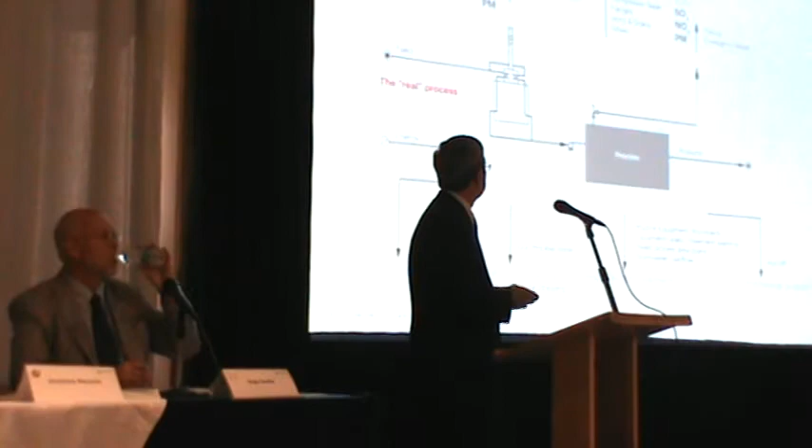Now, this slide is typical of any process unit. I apologize for the small print on this slide, but hope that you can study it more when you have the handout. What this slide shows is feedstock and energy coming from the left, and products going out from the right. There are air emissions shown at the top, primarily furnace stack emissions, fugitive VOC emissions, and any emissions from flaring or emergency relief. On the bottom of this slide, you will see water that needs to be processed: oily water to a wastewater treatment plant, processed water to a sour water stripper, and storm runoff water.

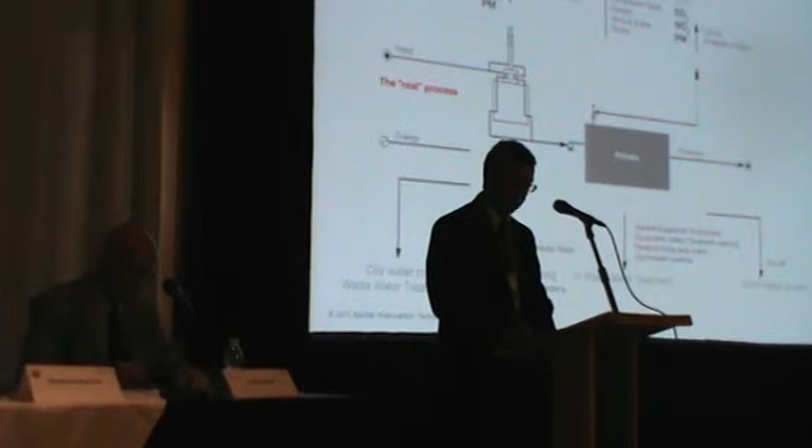Now, the emissions in a DCU unit are similar to those in a typical refinery unit shown in the previous slide. On the left, we show feedstock entering the process and products leaving. On the top are the air emissions from the same sources as in the previous slide, with the addition of particulate matter from the coke handling area in a delayed coking unit.

The water treatment is actually less dependent on treatment facilities outside the coker because of the closed blowdown system, shown at the bottom left. Oily water is processed in the closed blowdown system and returned to the process. Storm water normally is used within the process. The DCU actually reduces the burden on the refinery waste stream system by processing oily water and oily solids.

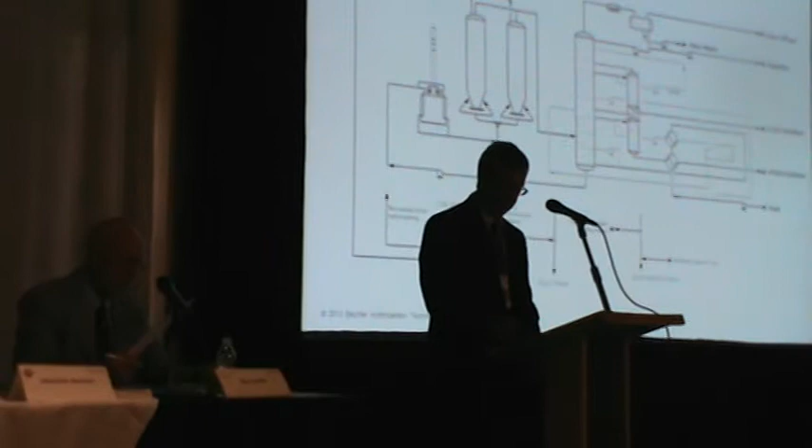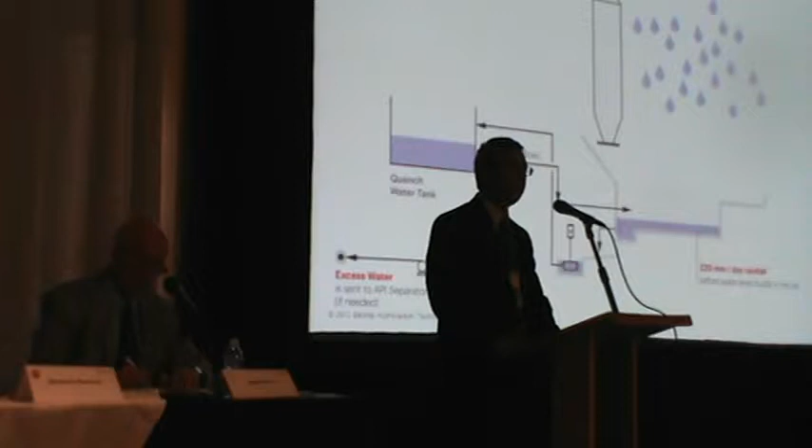Now let's begin by looking at water utilization in the process. We'll start with stormwater handling because this is relatively easy. Almost always, any rainwater that falls into the coke handling area is contained within the system and leaves as moisture on the coke product. In this example, typical annual average rainfall for a coker located in Malaysia is 10 millimeters per day. It can be a lot more than that, but rainfall would need to be greater than 220 millimeters per day to result in routing excess water to the stormwater handling system.

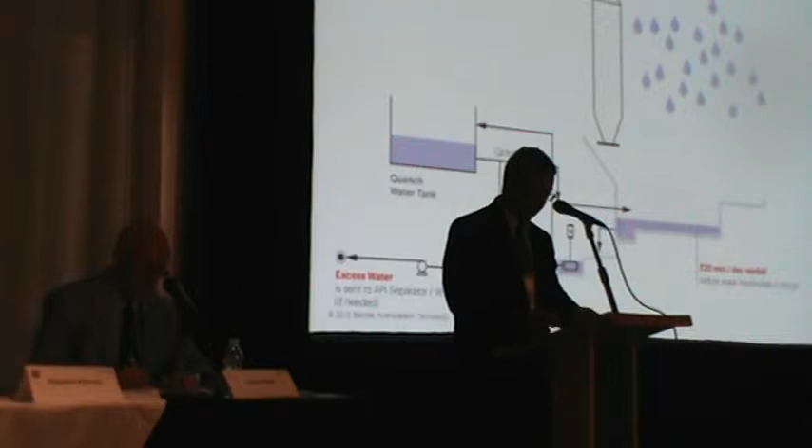As briefly discussed a few minutes ago by my colleague Rick Henneford, the steam is routed to a closed blowdown system, where it is condensed in the quench tower overhead cooler and separated from hydrocarbons in the blowdown system.

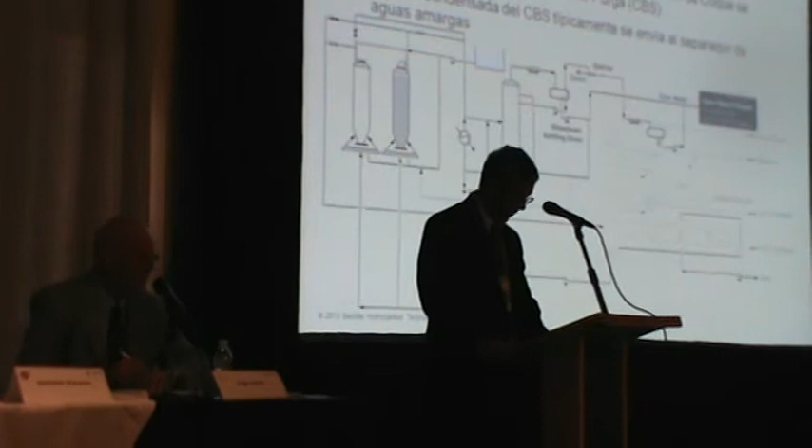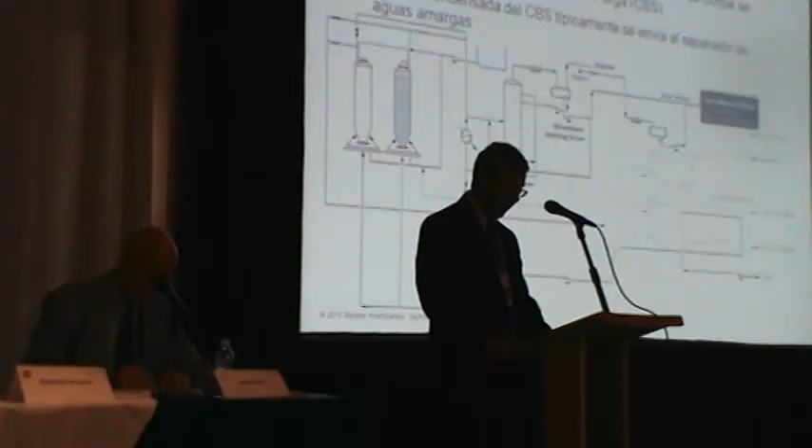Now, the sour water from these sources is routed to the sour water stripper. The main point of this slide is that all processed water from the DCU unit is contained, separated from hydrocarbons, and routed to the sour water stripper.

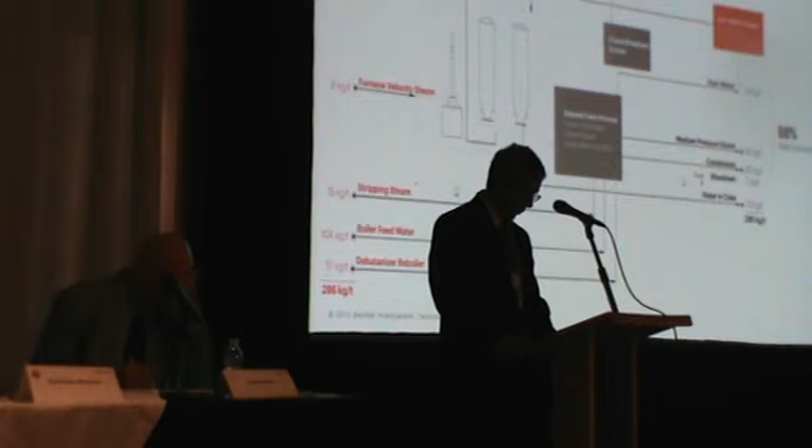Now the water that leaves the DCU, a little over half leaves as steam and condensate, about one third as sour water to the sour water stripper, and the remainder goes out mainly as moisture on the coke product. Overall, 88% of the water or steam that enters the unit is recovered for reuse within the delayed coking system that we designed.

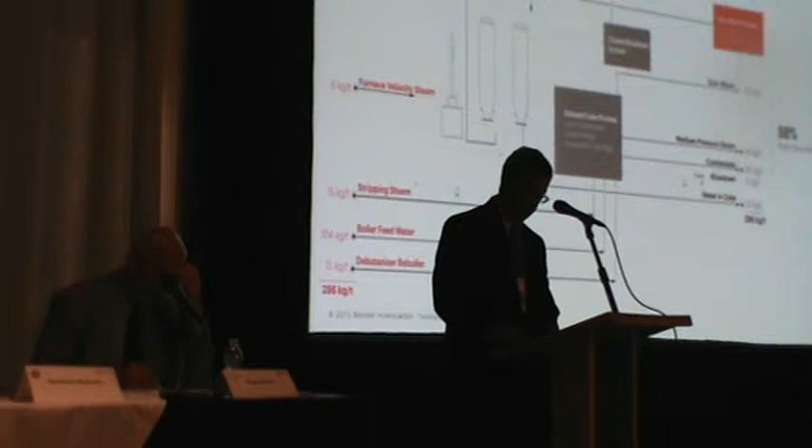Okay, now let's discuss airborne emissions.

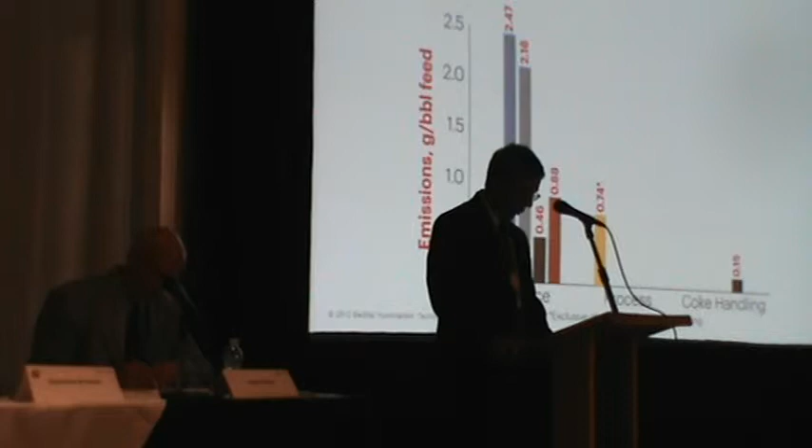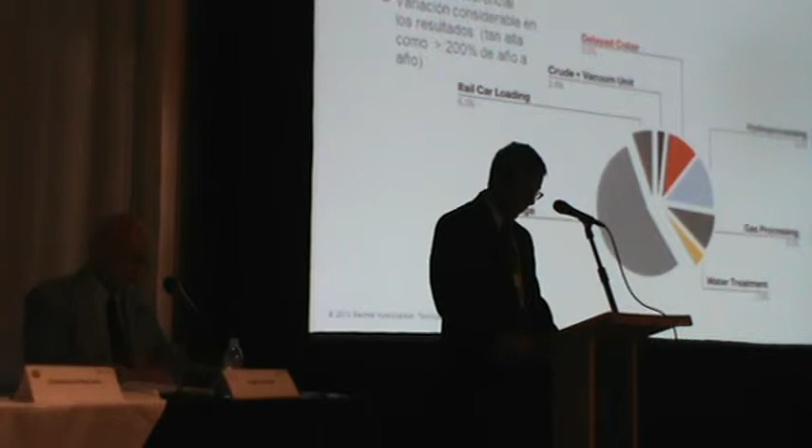In this case, tankage contributes over 50% of the VOC load from the refinery. Hydroprocessing was next at about 15%. Delayed coking and gas processing were about equal at 10% each. Everything else added to 15%. So as you can see, although 10% of the VOC emissions is significant, the DCU is clearly not the largest producer of VOCs.

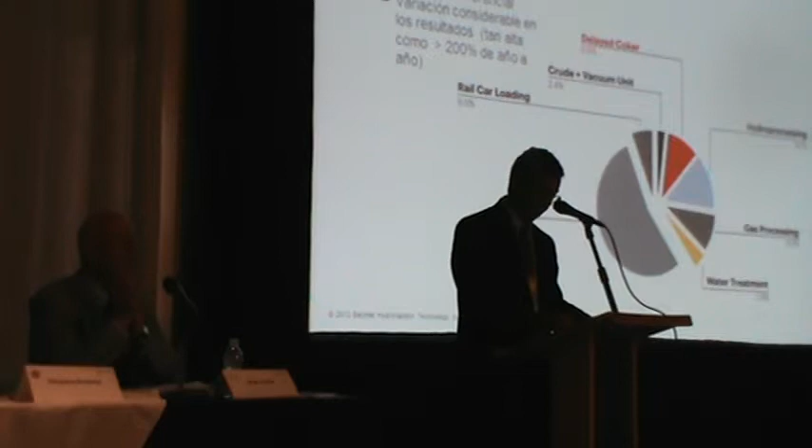With that said, let's take a look at VOCs in the delayed coking unit. One area of process VOC control that has received much attention lately is opening of the coke drum to the atmosphere after the drum has been filled with coke and cooled with quench water.

For the quench cycle, water enters the bottom of the drum and is vaporized. Steam leaves the top of the drum and is condensed in the quench tower overhead cooler. During this period, the non-condensable vapors are routed to the main fractionator. At the end of the quench cycle, an ejector is used to reduce the pressure on the settling drum to almost atmospheric pressure.

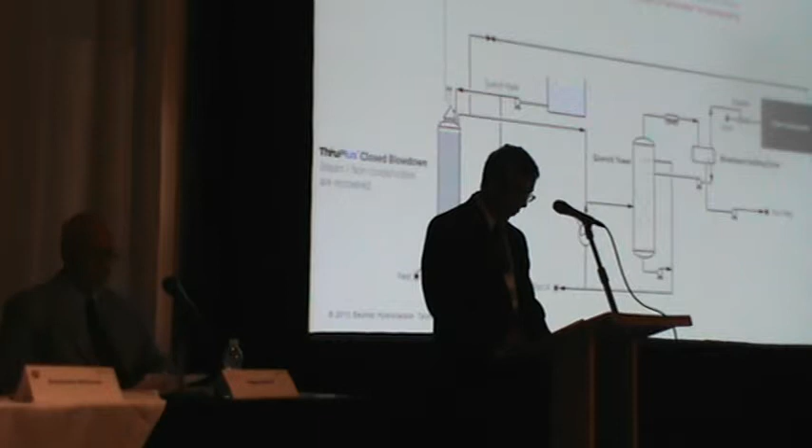Okay, turning to particulate matter, the emission sources that are of most interest are the solids handling system in a delayed coker. We will consider two areas of the delayed coking unit, the pit pad area and the coke handling and storage systems areas.

It starts by sliding down a sloped wall that acts as a barrier between the coke handling area and the process unit, and Rick described previously. The whole coke storage area is surrounded by high walls. These walls, along with the slope wall, effectively keep coke out of the process area of the DCU.

After falling down the slope wall, the coke enters a pit filled with water that keeps the coke fully wetted. From the pit pad, the coke is moved with an overhead crane to the pad, where it decants to about 8% moisture. With an overhead crane, there is no dust generation as there would be with wheeled vehicles.

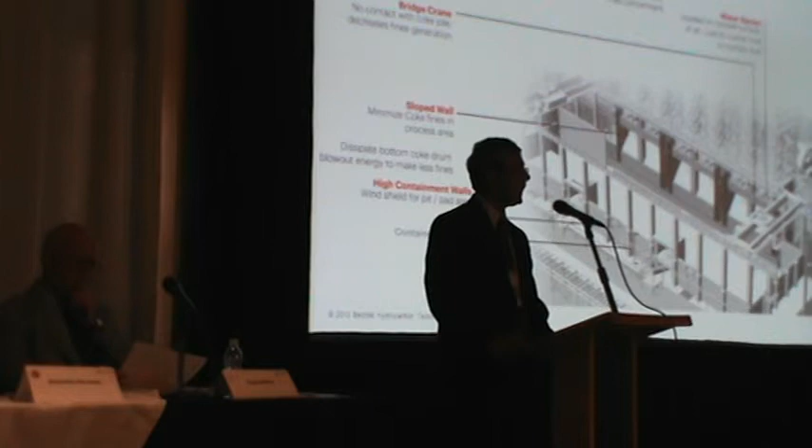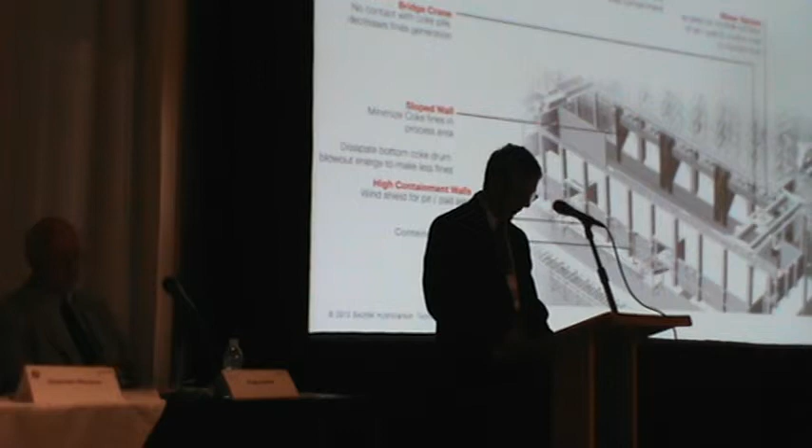After about 24 hours on the pad, the coke is loaded into a coke crusher located inside the high concrete wall, so any spillage goes back onto the pad. Finally, there are water sprays located around the perimeter to maintain moisture on the coke as needed.

The mode of transportation used to move coke from the refinery has a large impact on the design of the coke handling and storage system. Most of the features shown here are typical of all coke handling systems: maintaining proper coke moisture, an enclosed conveyor system, enclosed loadout system, and dust control at transfer and loadout points.

The type of coke storage, open or closed, and the amount of storage is also dependent upon the mode of transportation. Trucks generally require less coke storage and ships require the most. Dust control can be effectively accomplished, but these are engineered systems and it takes an experienced design team to make that happen.

The point of this slide is that there are various options for coke storage, and these options vary in the amount of fugitive emissions that exist and also the dollars involved in implementing these systems. Each refinery is unique in what type of system they can accommodate.

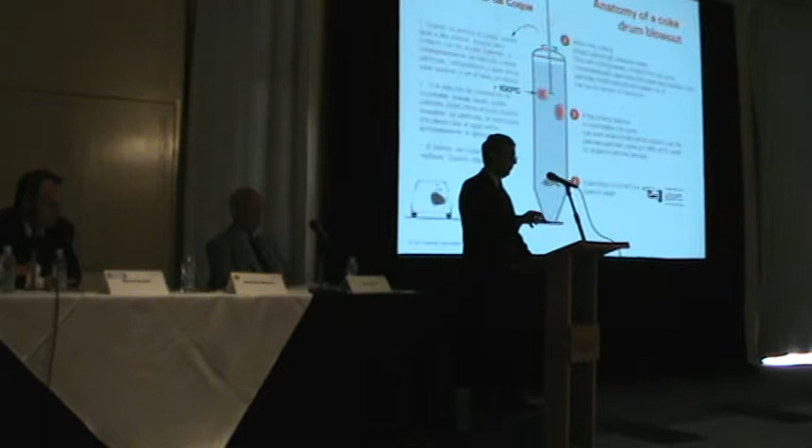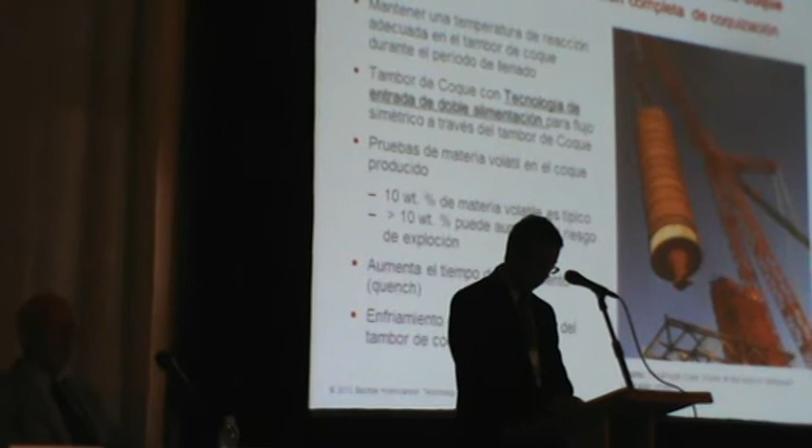I'm going to gloss over this slide because Rick did a good job in outlining blowouts and concerns of blowouts in a delayed coker unit. What I do want to briefly mention is the things that minimize the occurrence of blowouts.

Maintaining the proper coke drum reaction temperature usually means keeping the coke drum overhead temperature high enough to complete the reactions. A proper flow of feedstock into the drum is critical. Bottom unheading valves are a great invention, but they require different feedstock entry piping.

In many cases, a single side entry into the drum results in flow up one side of the drum, and the material on the other side of the drum cools and does not react fully. The local quantity of unreacted feedstock inhibits proper quenching and leaves hot spots inside the coke bed. Then we're back to the problems in the previous slide.

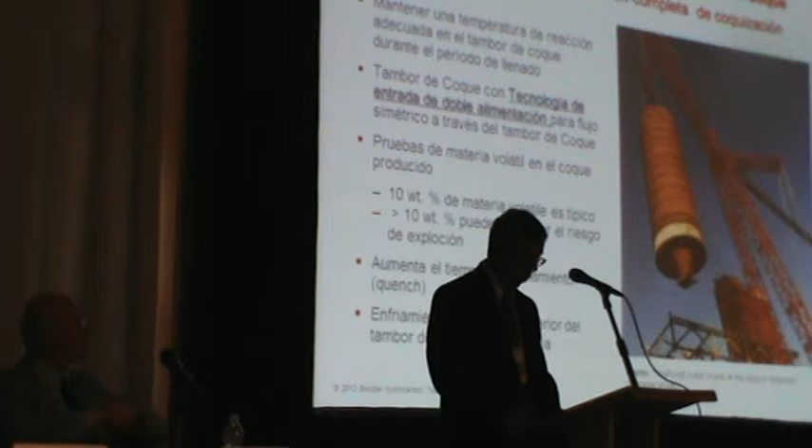Dual inlets have virtually eliminated this situation, and Rick has a presentation on dual inlet to follow shortly. Watching the VM content of your coke is a way of verifying that the coke bed is operated at an adequately high reaction temperature. Finally, quenching procedures are important to ensure that the coke bed is fully quenched prior to cutting the coke from the drum.

The Golden Eagle Refinery is located in the San Francisco area of California in the U.S., renowned for their environmental activism and stringent environmental controls. The Golden Eagle coker has been in place since 2008.

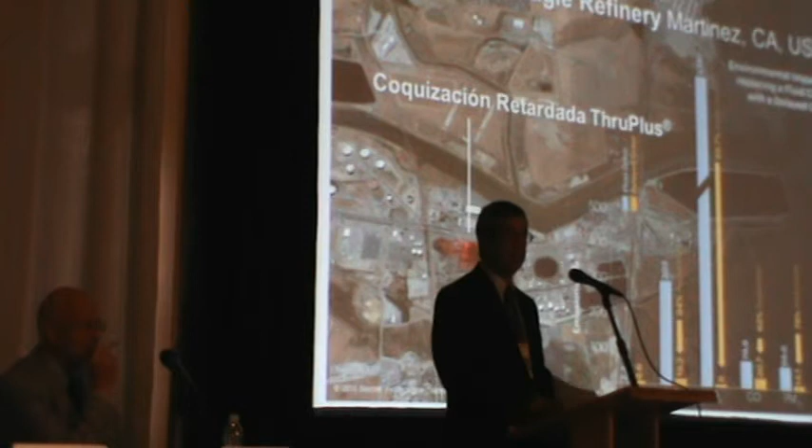So in summary, I want to leave you with three main points, as I mentioned previously. Our modern DCU technology effectively addresses the environmental issues that are unique to a delayed coker. Modern ThruPlus delayed cokers have demonstrated they are good neighbors in some very environmentally sensitive locations. BHTS can customize the environmental controls on a DCU to meet local requirements.